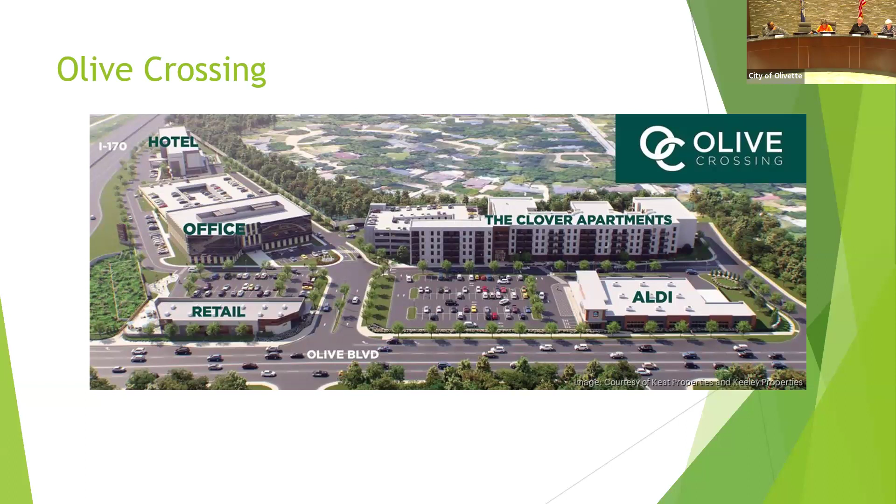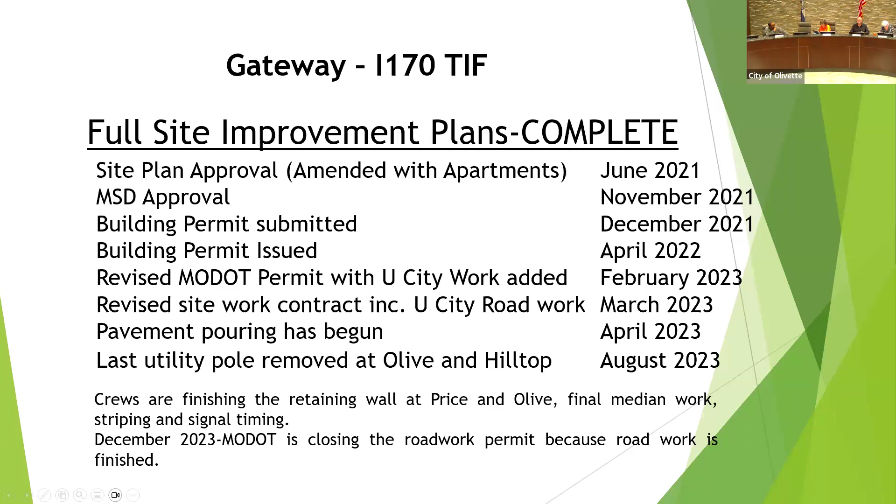All right, good evening, everybody. So this evening, as we typically do for your first council meeting of the month, we start with an update about Olive Crossing. So as you are aware, all of the site improvements have been completed. Lot 4 is the apartment complex, and as of May, they are over 61% leased. So they are moving quite along.

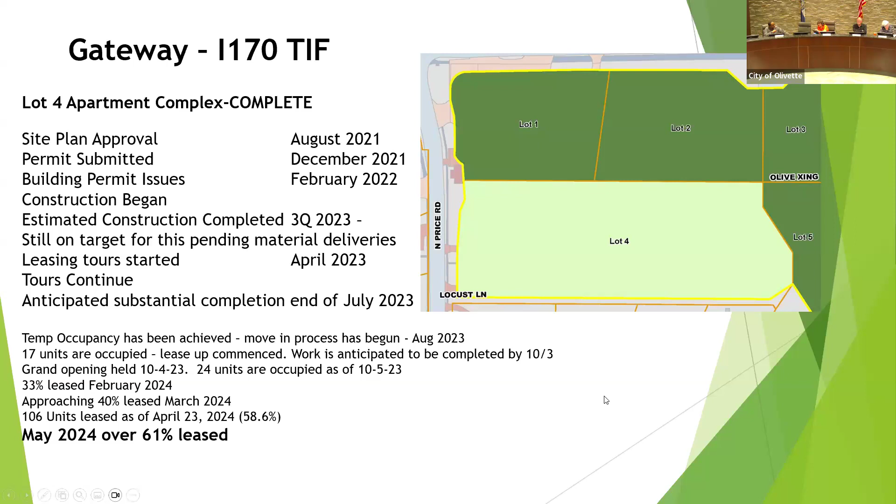In March, they were 40% leased. In April, they were almost 59%. And so now, for the second week of May, they are 61% leased. Lot 3, this is the planned retail strip center with Paris Baguette and Smoothie King. So this is the lot that the developer, Greg Yowitz, requested an extension for because his permits had been issued. So that extension was given until the end of June 2024.

And then he's working to start construction. Otherwise, his permits will expire and he will most likely have to go back to PCDC because he hasn't started his work relative to the permits and the site plan. And then he's let us know that he's discussing the remaining vacant space with possible tenants.

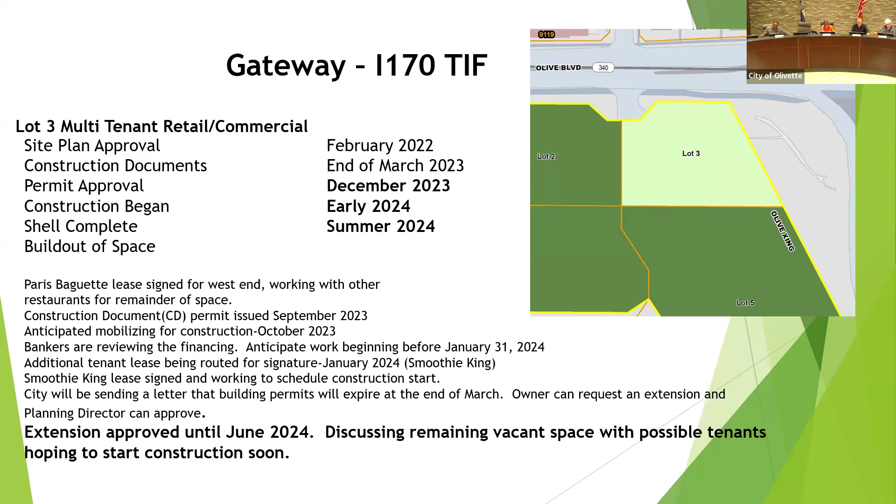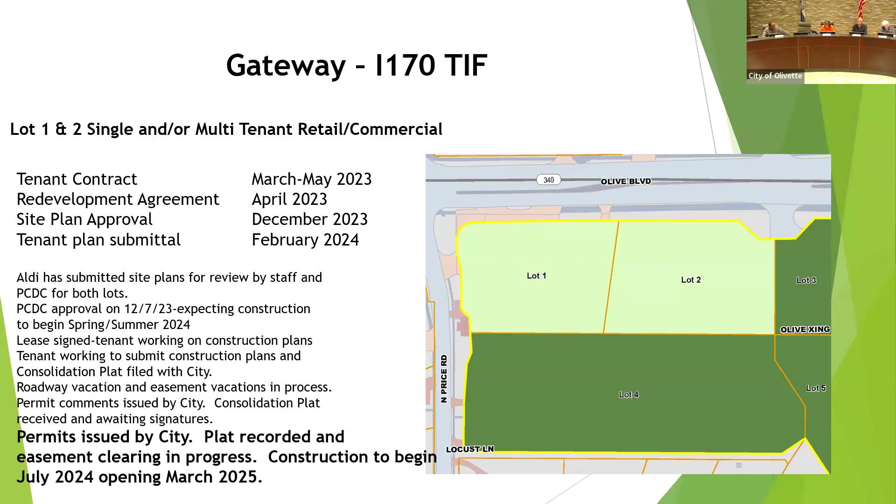Lots 1 and 2, this is the location for Aldi. So those permits were issued by the city. The consolidation plat has been recorded and they are doing easement clearing. So they're getting the easements that they need for that. And they expect to start construction in July of this year and open in March of 2025.

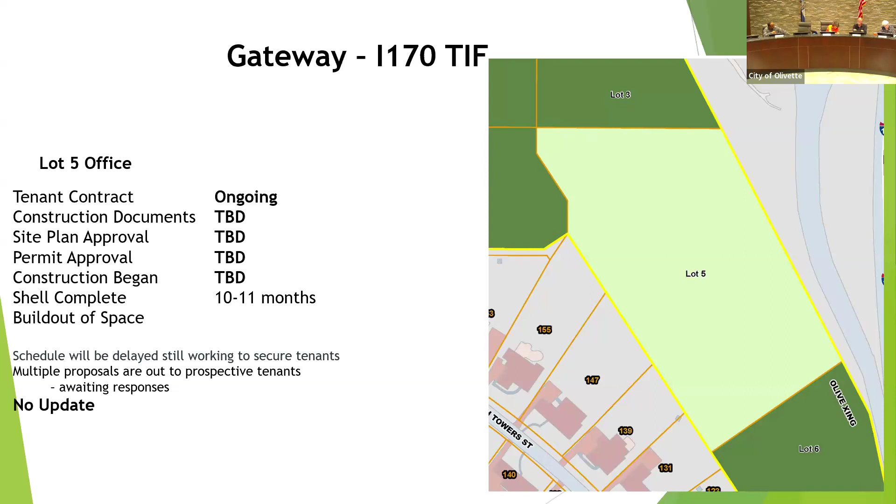And then lot 5 is the office building and he doesn't have any updates for that lot. As well as lot 6 is the hotel. And he doesn't have any real updates for that other than he's continuing to work with the hotel to see if they will start construction prior to lot 5 being done. As you may recall, they had desired for the office building on lot 5 to be finished before they started on lot 6, but that may not happen. So he's talking to them about changing their plans.

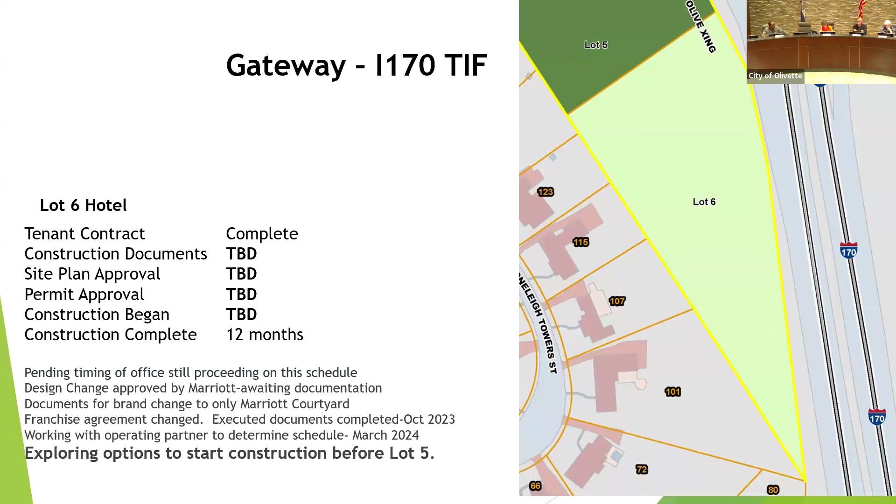A couple of upcoming events. The first is Olivette Night Out. Talking with the staff, we've scheduled that for June 18th. So I also sent you calendar reminders for that. So this is Olivette's Night Out Against Crime. It's this annual event, and we encourage all of the subdivisions and neighborhoods to participate, and they can register their neighborhood party on the city's website.

And then lastly, we'd like to talk about that there are open commission seats. There are 2 openings on the Parks and Rec Commission. There's 1 opening on the Personnel Board of Appeals, another opening on the Olivette Housing Authority, and then an opening to fill an unexpired term on the Planning and Community Design Commission.

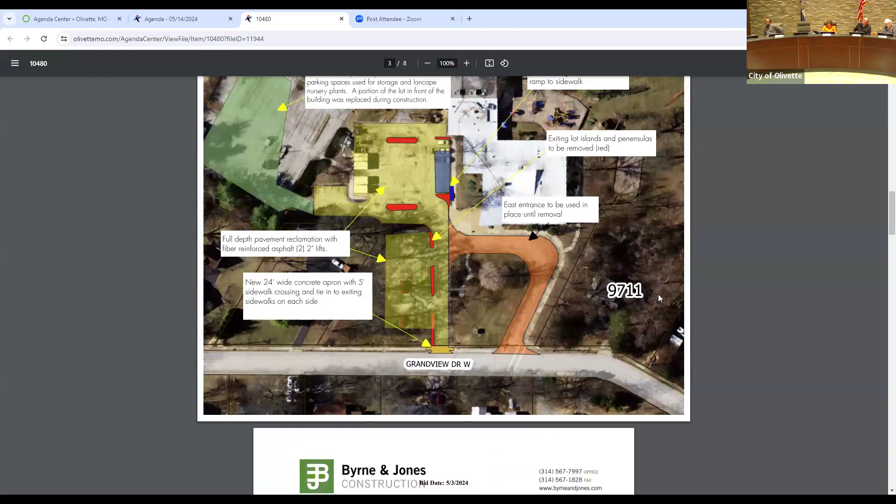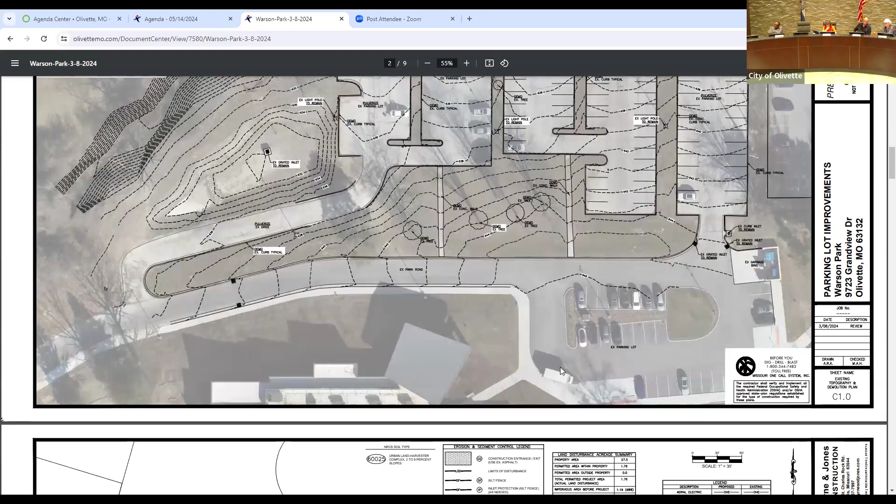And we came up with an idea to reserve an area in between the parking lot and the new parking lot, sort of in that little peninsula. It's linked in the submittals. There you go. To reserve an area it could be for a future basketball court, future pickleball court, future something that would sort of be nested between the 2 parking lots for an outdoor sport. So we're reserving that area right now where the cursor is. And when you come forward, there it is right there in between the 2 parking areas.

So on your lower side of the drawing is the entrance drive. Below the area that's shown with the topo is Five Oaks building. And then you'll see the tight gradation marks along the north side of the lot. That's the profile of the River Des Peres all along here. And you'll see there's 2 little bump outs in that dark line of the curb. Those are where the curb inlets are, right there, a little to the left. There you go. And then the next one's down there in that area.

So we're consolidating this into one large parking area. We really aren't changing the actual impervious. We're actually decreasing it a little bit since we're reserving the area for future sports. And then we're just creating a space that's going to be easier for us to maintain and easier for the public to negotiate in and out, and less traffic intersections. Before I move on to the Grandview site, does anybody have any questions about the parking layout or the process we went through to determine where to go?

When you say a sustainable contracting company, what is it that they do that is so unique? Sure. So they're using a process, and when you have a little minute, there's a video that's linked in here. One of the challenges we have at Five Oaks, and in fact, many of our sites and a fair amount of our streets, is we don't really know what's underneath the asphalt, unless we've done a project to cut it open. So we see indications, right? There are soft spots where we find puddles. We know areas where there's certain kinds of deformation in the pavement. And basically, those are indications of either poor compaction when it was constructed or poor base materials. So we knew this whole lot was full of these sort of questionable areas.

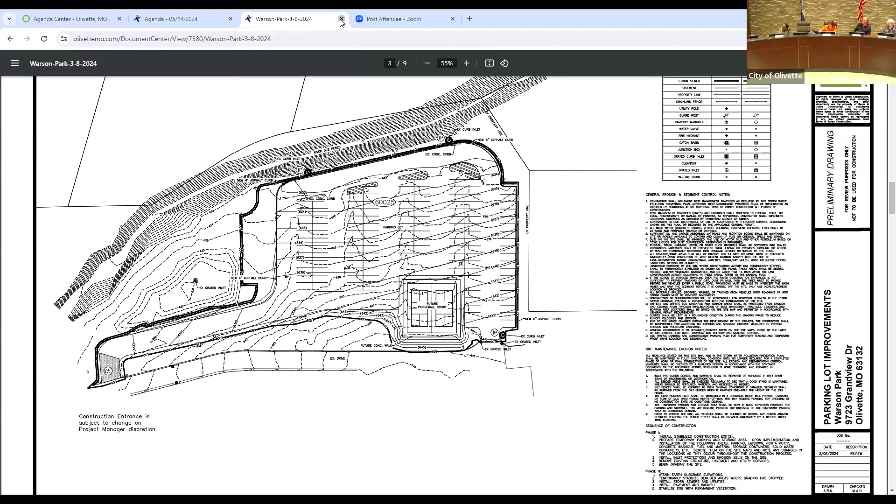So once we had this dialed down, then we moved over to the Grandview site. This was our number one priority. We really wanted to get an efficient and responsible design completed for our new Five Oaks Community Center. And then we came back to revisit the old community center site on Grandview. And here we had to look at this and say, where are we going to economize? We need to make an investment. We need to make improvements, but just redoing what we have maybe isn't the smartest solution.

So we met with Beverly and we talked about staff and what they expect for future uses, and decided that the area in orange, which was the old bus entrance, really doesn't serve the public anymore. It doesn't give us parking. We don't have kids getting dropped off there at the community center anymore. And we really felt like that was not a worthwhile investment to replace the asphalt. So we're going to use that in place until some point in the future where it'll get removed, get planted with grass or landscaping or a new focal point for our Olivette in Bloom or somebody else.

And then at that entrance at Grandview, you'll see there's a crosswalk striped on Grandview a little bit to the right. There you go. That crosswalk is really a non-compliant crosswalk. It goes from driveway to driveway. So we need to reconstruct that with a plan to make a mid-block crossing. It needs proper signage for the crosswalk ahead. And it needs proper landings on both sides. So we didn't feel like we had enough to invest and to fix all of that at once.

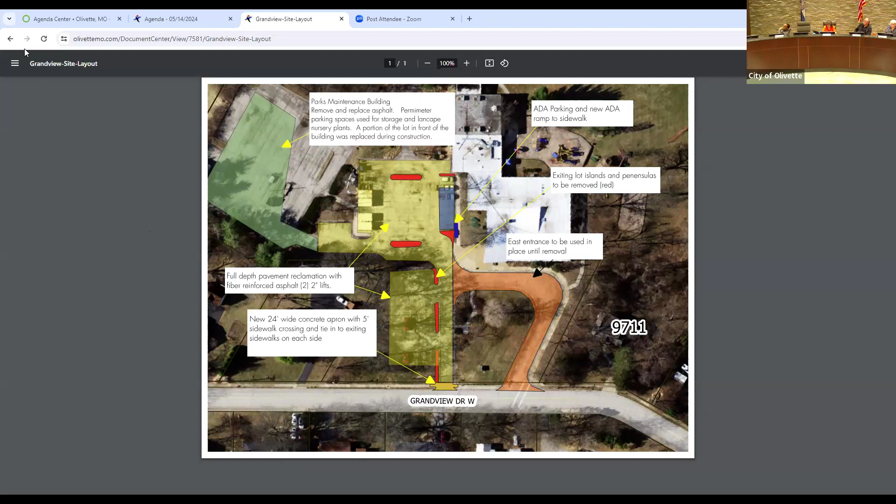I have a question, Bruce. Can we go back to the map? Black and white one. The one of Five Oaks? No, the one on Grandview, yeah. So where the building is, the Parks building, all behind there is not open to the public, is that correct?

No, there's a very small area. Well, okay, say behind the building. Is it between the Parks building and the Greenery Apartments? Oh, you mean, is it fenced? What I'm getting at is behind the fields back here, we have baseball or soccer. Where do we anticipate the people who are bringing their children and watching the games parking? Well, they'll park either at Five Oaks or in the yellow area here.

Okay, so the yellow area is for, we'll call this Upper Warson Park, for lack of a better term. So if somebody was going to the fields that were once behind the old community center where you go down the hill, that's what this would be parking for, and it's really a complement to the parking at Five Oaks, right? It's all Warson Park.

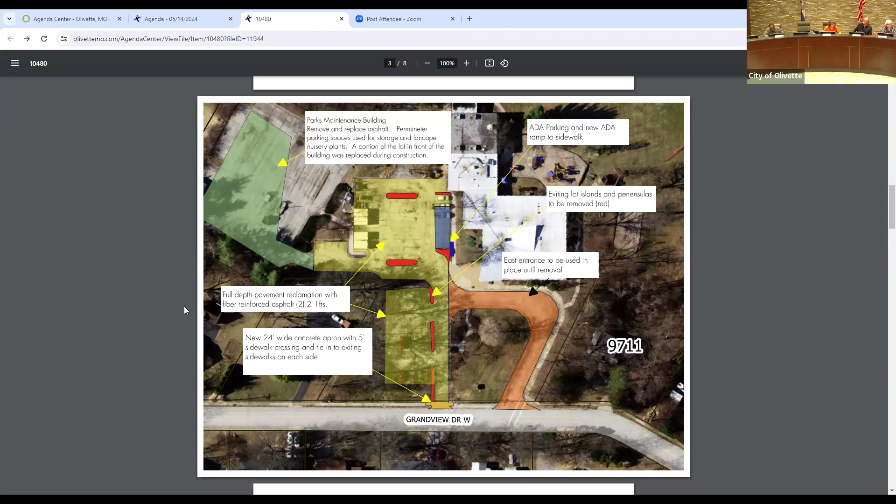As far as funding allocations, we have 2 funding sources. One of which is just our capital improvement fund, and the other is the allocation in the ARPA funds. So that takes us up to a grand total of $650,000. I've programmed, through lots of negotiations, to keep this project in the order of 612,000 with the contingency that keeps us under our $650,000 budget allocation.

There's always risk when you dig something up. We've done a lot of research about what's out there, but you always get a surprise. But I feel pretty comfortable having walked around the lot with the contractor and staff a dozen times looking for things, that we've anticipated everything that we can.

All right, is there anything further that anyone wants to ask or anything further you want to share before I ask if anyone would like to make a motion? All right, anyone like to make a motion? Madam Mayor, I make a motion to authorize the city manager to enter into an agreement with Byrne and Jones Construction for Warson Park parking lot reconstruction with a base contract amount not to exceed $612,280 and contingencies not to exceed $30,000.